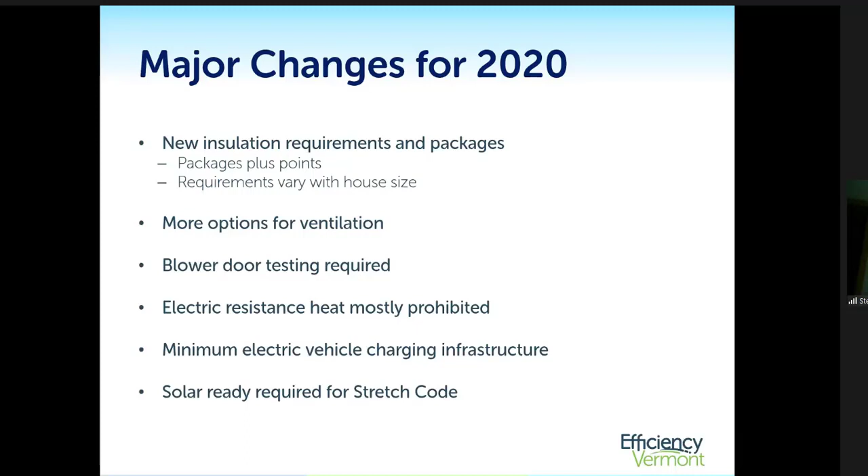One distinction I wanted to call out early on clearly is that there is definitely a distinction between the actual code itself, the full rule of law, and the RBES Code Handbook. They're two different things, and one should not be supplanted for the other.

Many of us are familiar with the RBES Handbook - it's been a variety of colors over the years. The code book, or the handbook, is published by the Department of Public Service. Efficiency Vermont contributes to the content for it. The handbook is still being readied to be published - it is not published yet. Hopefully that will be happening sometime soon; it's in the department's hands to take it forward. We don't know what color the new one's going to be this time around. There was discussion of kilts in the last conversation around it, so it could be plaid, we don't know. But there is a clear distinction between the handbook and the full code.

The handbook is basically there to provide guidance on how to apply the code in the field. The full RBES code language itself, available through the ICC, contains all of the code requirements and the detail of the code. So I encourage everyone to become familiar with both, and the content of today's training is going to be linked directly to the sections and the code language of the full code itself, not the guidebook. So I want to make sure that message is understood. As a builder myself, I was more connected with the code handbook than with the full code, so it's definitely something to be mindful of.

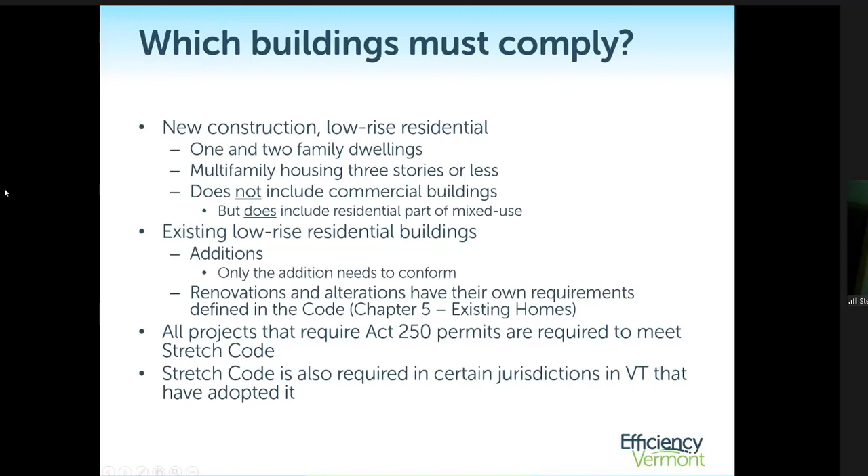Exempt buildings: low energy use buildings, which is a pretty restrictive bar to be met. Unconditioned buildings, so anything that's not a residential building essentially. Mobile homes have their own requirements.

That is a national standard, and those buildings will need to meet those requirements by the manufacturer. One note around mobile homes, though, is that any site-built components, so you're putting it on a basement, a full basement for some reason, or a crawl space, or some sort of foundation underneath, that would need to meet the requirements of the new construction code.

Hunting camps, summer camps, basically seasonal buildings are exempt. Yurts, if you're into that, those are exempt also. And owner-built homes, and there's a distinction with owner-built homes.

This has been used sometimes as kind of an out for builders to not have to fully comply with all of the requirements of the code. But the language around owner-built homes is pretty specific, and all of these conditions need to be met in order for it to be seen under the rule of the law as a true owner-built home.

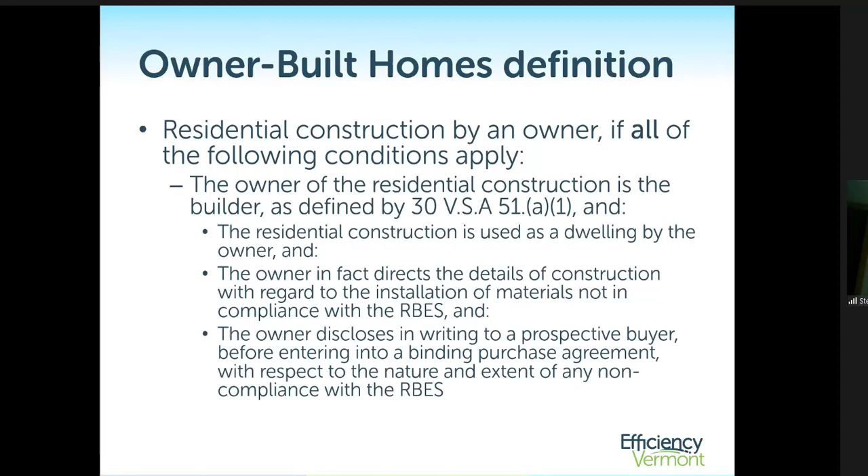So there is that provision, and the owner is still required to submit an RBES certificate, but there is a specific owner-built certificate that they're required to fill out that will define any deficiencies in compliance with the full code.

Existing buildings, additions, alterations, repairs must comply if changes go from unconditioned to conditioned space. So that's a trigger, I would use a cape as an example. If you have a cape with an unfinished second floor and you're doing a renovation project to turn that into conditioned space, that new conditioned space that's adding conditioned volume to the building is going to require that area meet the requirements of the code for new construction.

Insulation projects, if you are adding insulation to a building, the intent is to try to bring those areas up to the current code requirements, but it does allow for basically cavity fill, to fill the cavity that is exposed. So basically, if you're exposing an exterior wall and you have a rough sawn 2x4, that cavity needs to be filled with some type of insulation before it's closed back up. There's not a specific R-value called out that's required.

Replacement windows must comply. So if you're taking a full window unit out and replacing it, that window needs to meet the U-value requirements of the new code. If you're just replacing glass, replacing the glazing in a window sash, that does not need to comply. Storm windows do not need to comply. So more distinctions in what is exempt and what is not for existing buildings.

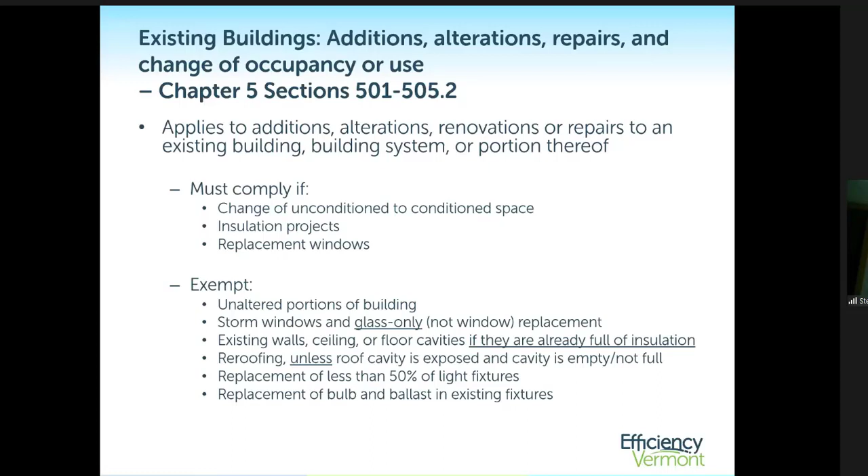Liability, this is really the way that the law was written. Since there is no code enforcement, there's no direct oversight by a state agency. The way that there is some teeth to it is that a homeowner can take civil action against the person who's certifying the building, whether that's a builder or HERS rater or whomever.

But the builder basically has the responsibility to be meeting the full requirements of the code. A homeowner can seek to recover damages that include energy costs, costs to bring the building into compliance, attorney's fees, etc. Claims must be filed under the full rule of filing it as a claim against RBES deficiency within 6 years. I'm sure if you talk to some attorneys, they'd probably see that there's more liability exposure beyond that 6-year window that would be relevant outside of the strict adherence to the RBES rule if there's building durability issues.

One of the other factors coming into play here is we're seeing more adherence to RBES by way of the real estate market. More lenders and title attorneys are looking for the RBES certificate in order to close loans and mortgages.

So just to be clear on this, though, the lack of that RBES certificate does not impinge the title of a property or a home, so the sale can go through as long as the parties agree that they're okay with that. Though there are some of these other factors mentioned here that if that certificate's missing, it may still become a factor in the sale of the property.

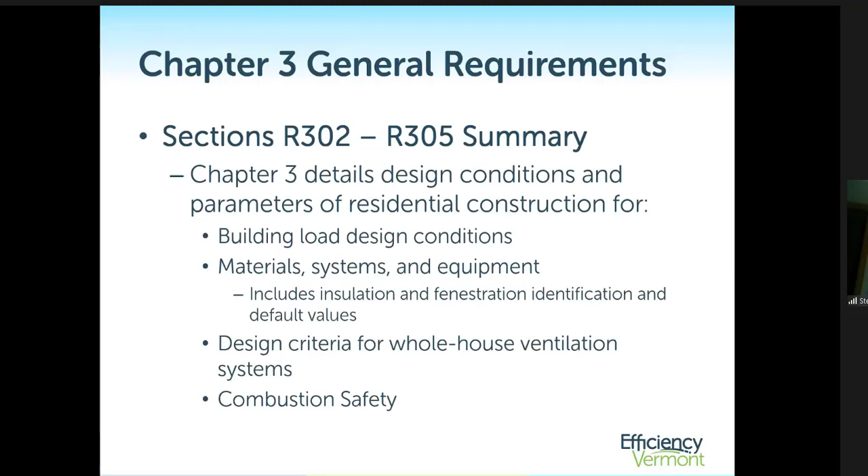Chapter 3, General Requirements. This section covers some of the design considerations and conditions that should be used for determining equipment and systems in the building — building load conditions and design requirements, material systems and equipment. A big part of Chapter 3 is ventilation requirements, mechanical ventilation requirements, and combustion safety.

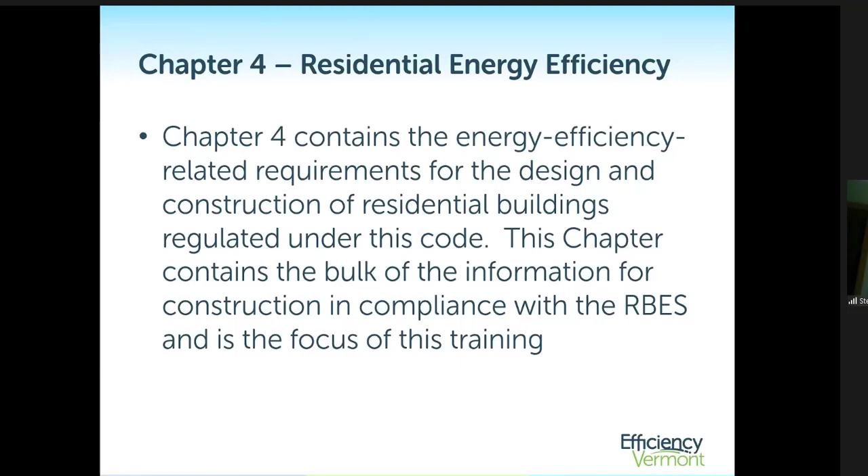The heart of the code, and what the rest of these slides will cover today, is Chapter 4, Residential Energy Efficiency. This section covers all of the building component requirements — the R values, the U values, the alternatives, the installation specifications for those materials. It's the bulk of the code, and as the 2020 code is written, it's built around the prescriptive compliance path.

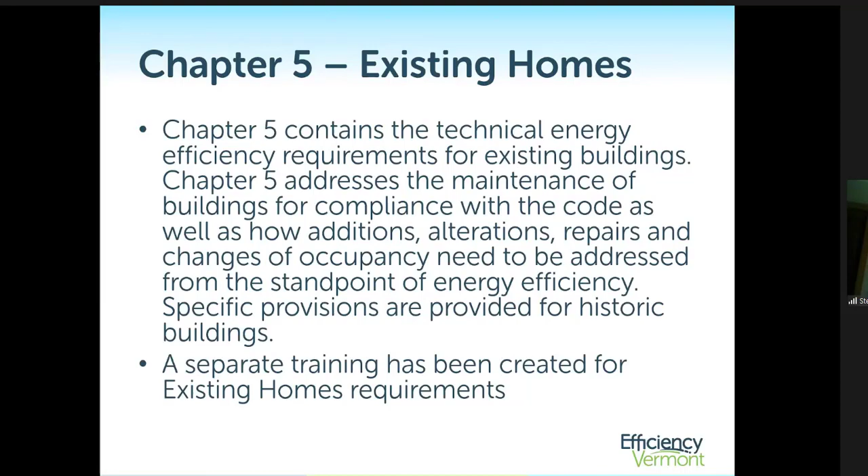Chapter 5 is specific to the requirements for existing homes, and Chapter 6 is basically just a summary of reference standards — fuel codes, the IECC, the IRC, the IBC. I sometimes get IBS mixed up thinking about the code — that's something different though. So there's plenty of content there to refer back to.

So, prescriptive compliance for new construction and additions here. Again, if you're building an addition, it needs to meet these requirements as if you're building a new house. The referenced sections here are sections R402 through R404.

Just to review quickly, compliance methods: you have 3 options to comply with the code — the prescriptive tables, which is what we're going to cover, the REScheck software method, and the HERS rating pathway. The REScheck tool is still in the process of being updated to align with the 2020 RBES from where it was left before, which was aligned with the 2011 RBES. So it's still a bit clunky at the moment, but is being updated and should be ready by at least September 1st as an option.

The HERS rating pathway is the option that Efficiency Vermont offers as far as enrollment in our new construction program. So if you enroll in our new construction program, we will provide the HERS rating services for you.

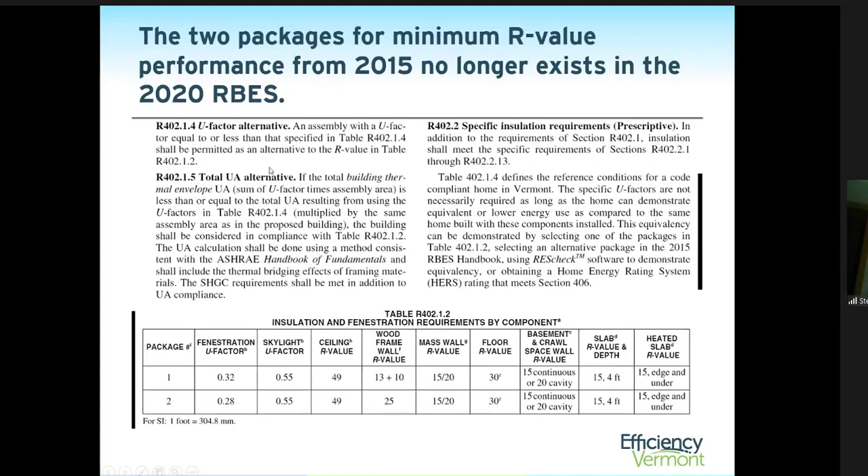One point to make as a big difference from the 2015 to the 2020 code is that in the 2015 code and previous versions of RBES, there was a table, R402.1.2, that was minimum performance requirements for the building. This was basically the baseline - you had to build at least to this standard or better. And then there were the prescriptive tables, which were separate from this. This table no longer exists. This minimum performance package no longer exists. Our reference point now for prescriptive compliance is these 5 packages that are available for that method.

The code review process has basically eliminated cavity-only installation for above-grade walls, except for one package. So there's only one package available now where you can just do cavity fill in above-grade walls. Code is moving in the direction of continuous installation requirements, so there are 3 different continuous installation packages. Log homes are their own separate category - they have their own requirements, and there's a prescriptive table in the code specific to log homes.

As a reference point for the packages, I'll talk quickly through package 4, the cavity only. For any of the continuous installation options, your ceiling requirements are going to be R49. If you're going to do cavity only, you're going to be required to get up to R60 in a flat attic, R49 in a slope.

A bigger bump here is foundation insulation. It goes from R15 to R20 continuous if you're going to do cavity only, or a combination of R13 in a cavity with R10 of continuous as well.

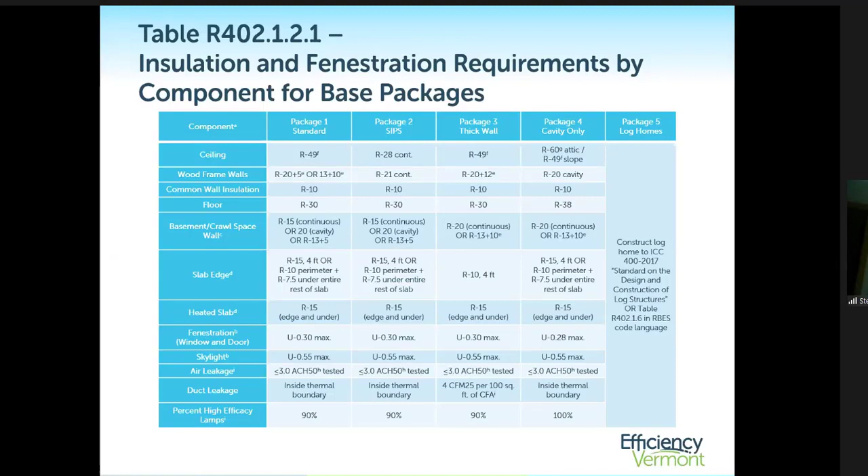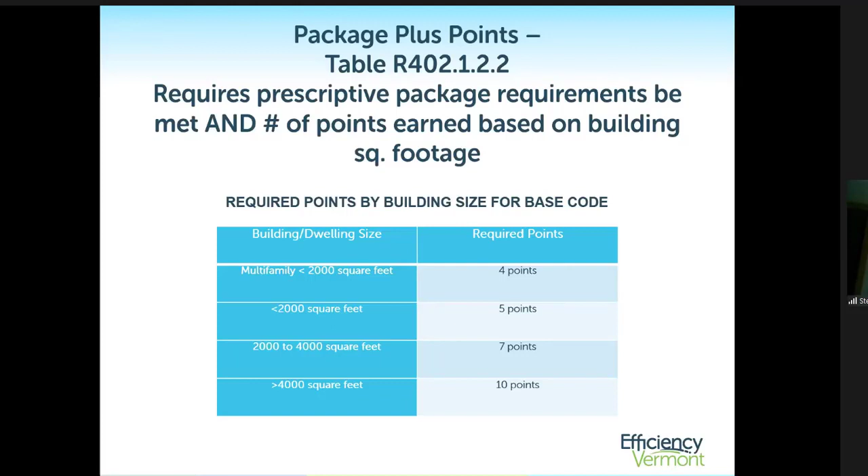The next big jump from this is, in 2015 and other versions, you would just choose which package you wanted to follow, meet all of those requirements and follow the installation requirements, and you're good to go. But moving forward now, you're also required to attain points based on the size of the house. This is a requirement prescriptively and with some of the other pathways too - you need to be gaining points in a points table based on the size of the house.

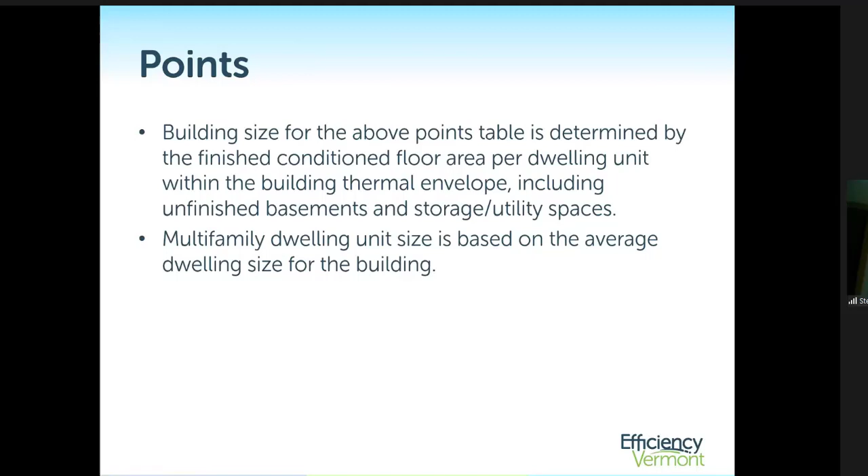Building size is based on everything within the thermal envelope. So even if you have an unfinished basement or some storage type areas, those need to be included in the calculation for square footage. Multifamily size is based on the average dwelling size for the building. There's a pretty expansive table in the code now of what your options are for attaining points based on different categorizations.

I'll use this example - you can see that there are things where you can upgrade the walls from, if you choose the cavity only package and you want to comply with the component values in that, but you can flex on the walls. You can gain a couple points there.

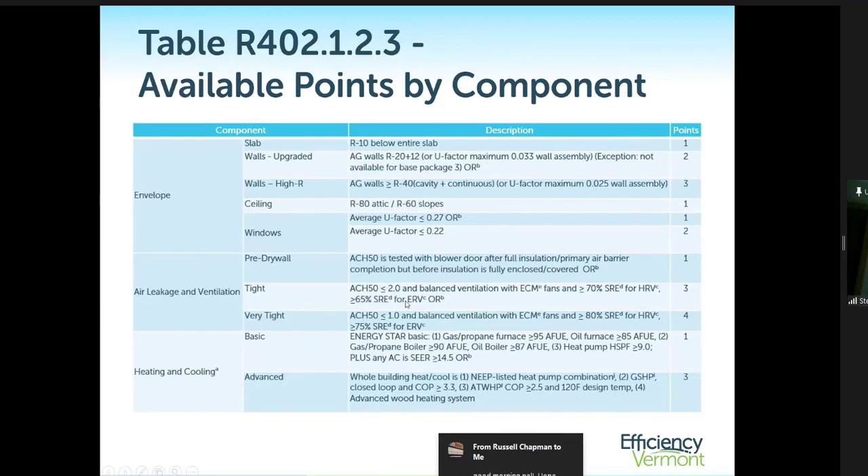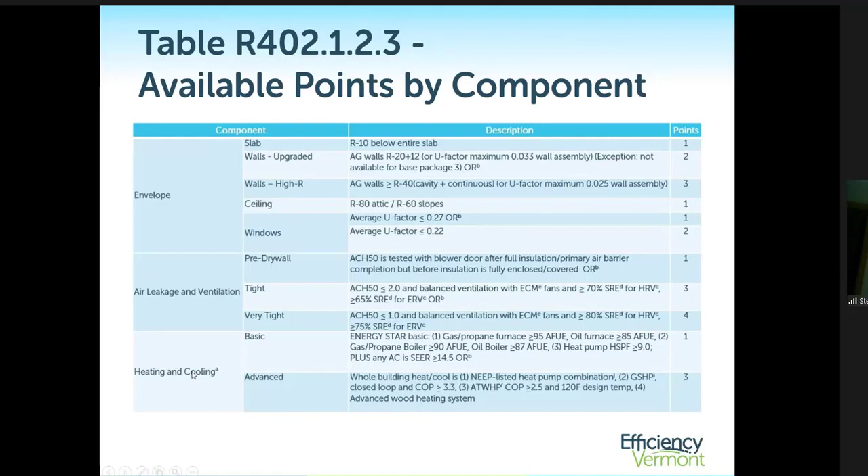You can gain a point by having a pre-drywall blower door test done on the building to verify that you've got a well-performing air barrier. You can install balanced ventilation as an alternative to exhaust only. And then there's specific performance requirements if you're going to be installing an HRV or an ERV that are laid out here, which we'll touch on further along. So you're gaining points by combining any items in these categories to meet what's required based on the size of the house.

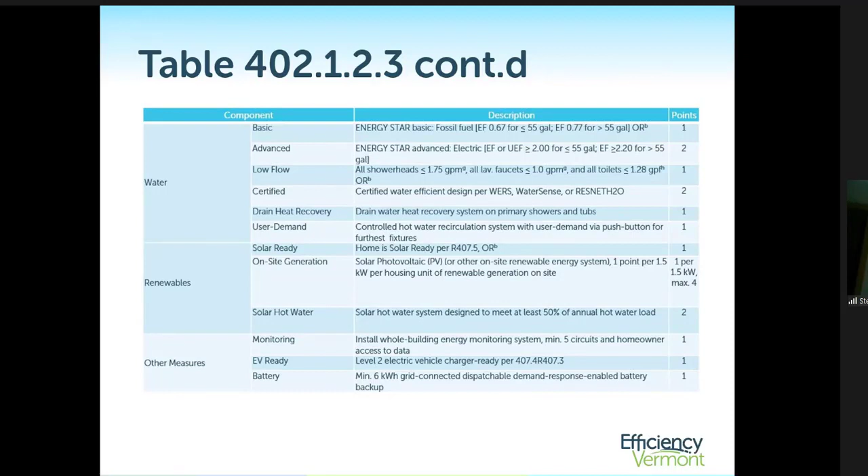Stretch code is a more stringent requirement than base requirements. Stretch code comes into play if you have a project that has an Act 250 permit pulled for it, and also some other towns like South Burlington, and I believe Williston now too, having adopted stretch code, have some more stringent requirements around building performance.

It does push you in the direction needed to do balanced ventilation, and if you're doing stretch code and going to use balanced ventilation in the building versus exhaust only, you need to be specifying an HRV or an ERV that has an ECM motor and has an efficiency of at least 70% for an HRV, or 65% for an ERV.

This is why the code is kind of written as a design document, so that these things can be understood, defined, and specified at the beginning of the project. Because I tell you right now, it's much harder to find an ECM motor HRV than just going and pulling one from the stock at Webb's or Granite Group.

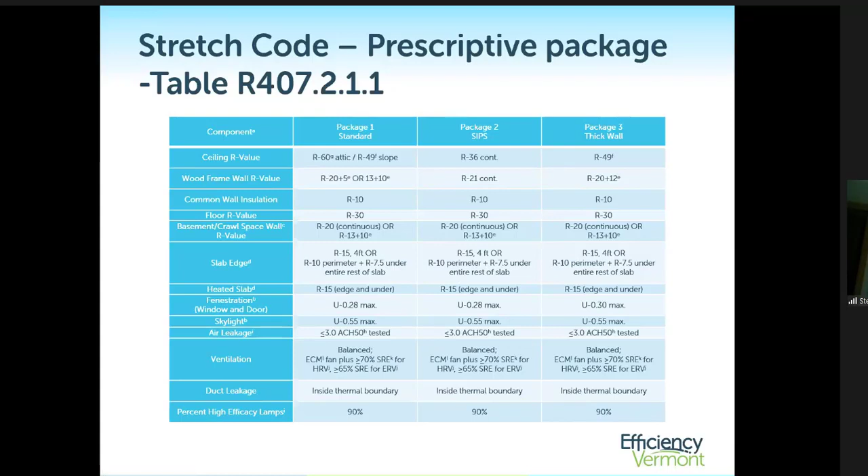They're working with those suppliers and distributors to help them get to the point where they're going to have more code compliant options available. But these are things to be having conversations with your subs about, to make sure everyone's clear as to what's going to be put in and what's getting put in meets the requirements of the code.

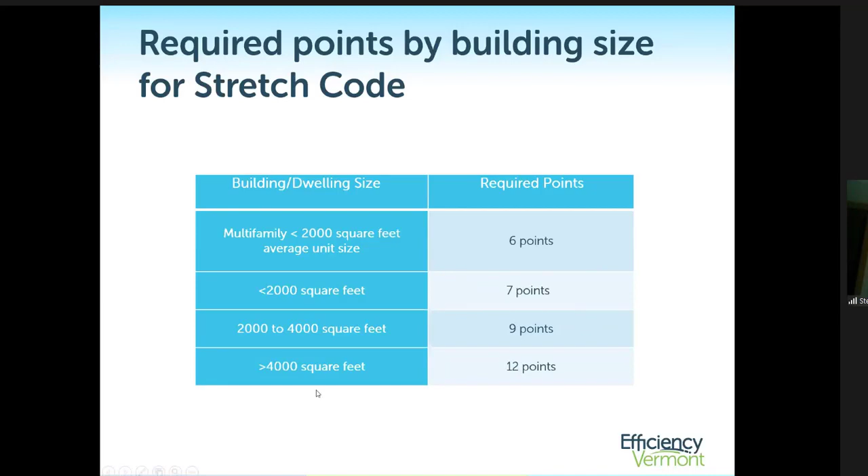Same points requirements with stretch code, but a little bit of a bump up in the number of points required based on the building size. So again, the same tables we're talking about here can be referred to for those points.

Stretch code compliance means all the base code requirements need to be met, as well as what's defined in section R407 that's specific to stretch code. So you have only two options with stretch code to comply: you can use the prescriptive path as we're defining here, or you can have a HERS rating done. You cannot use REScheck as an option to comply with the stretch code.

I don't go into detail on the solar ready, but basically there are requirements in stretch code for both electric vehicle charging and for components to be put in place to allow for the integration of photovoltaics, either at construction or at a later date. So there are some direct provisions in stretch code that call those things out specifically.

Getting back to base code prescriptive compliance, I'll just put it out here at the beginning that there is an alternative to meeting the full R values of the prescriptive tables that's carried through from previous versions of the code. This is the U factor alternative. There's a table specified in the code that allows you to use an assembly value versus a component value to comply. This means you have to do some calculations to understand what your full U value assembly is going to be versus what you have in the cavity.

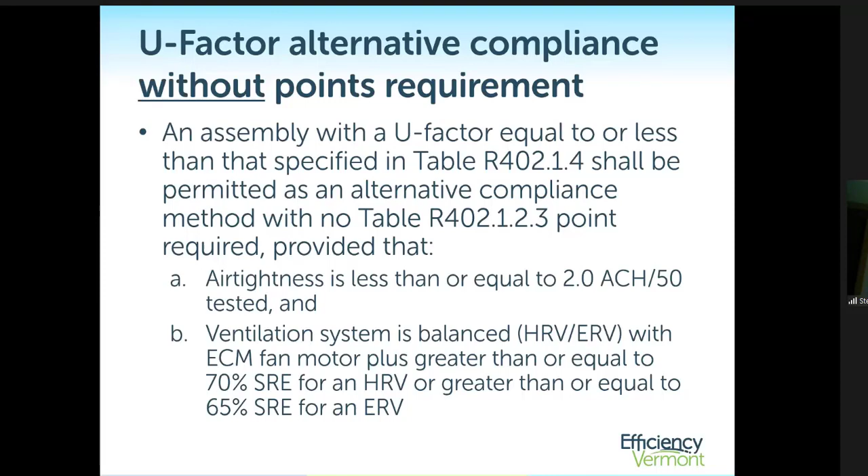As a backup, I provided Chris with some reference documents I've created that pull out content from the code specific to different trades. Basically, cliff notes for code. We'll have those available to reference so you're not trying to think back through all of this and remember how it applies. That'll be available to everyone who wants to take advantage of it.

Just briefly, the difference between R-value and U-value. I'm not going into real detail, but the key takeaway is that in this alternative method, you have to do the full assembly calculation, not just substitute U-value for R-value in a component. So the bottom line is try to meet the prescriptive values completely in the full 6-package prescriptive table. These are the U-value alternatives.

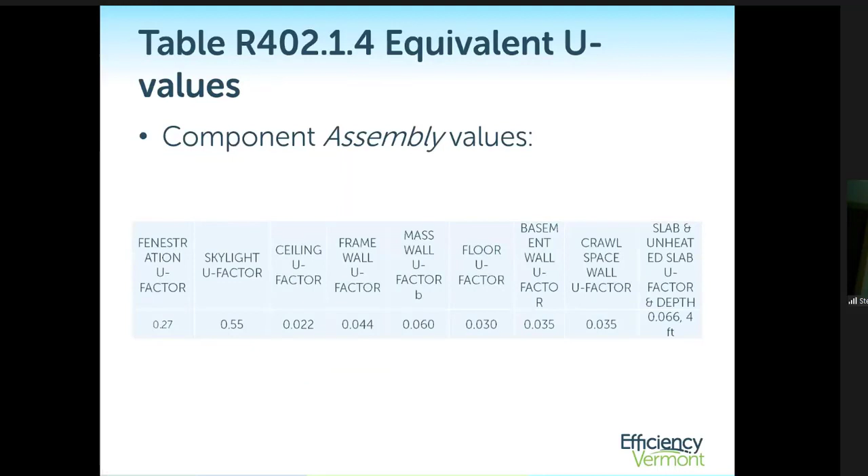Some other notable exceptions: for ceiling insulation, where R49 is required in the prescriptive table, R38 can be substituted over 100% of the ceiling area as long as it's installed at full uncompressed height out over the exterior walls. The same provision is allowed for substitution to R60 — you can use R49 as an alternative to R60 as long as it's also fully uncompressed over the exterior walls.

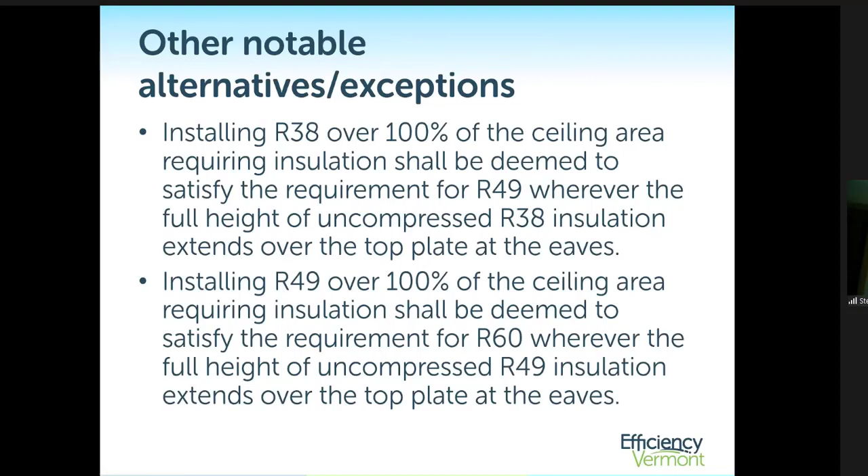For closed cavity ceilings, if you have a section of the building where R49 isn't practical given the framing member constraints, R30 can be accepted as an alternative, but there are restrictions on area — limited to 500 square feet or 20% of the total insulated area, and it also needs to be full uncompressed height all the way out to the exterior wall.

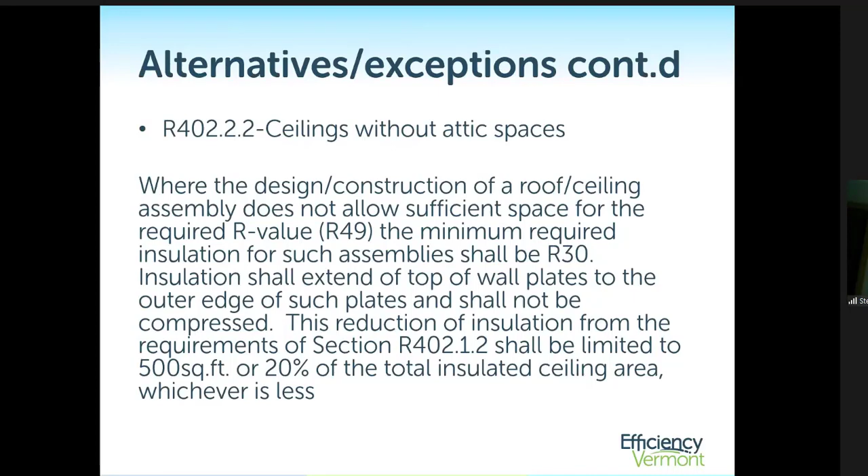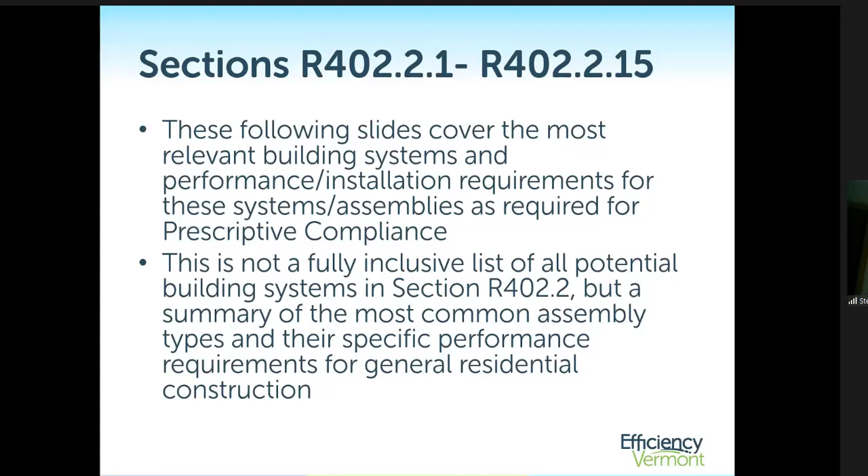This next section of the code gets into actual performance requirements for the installation of materials in the building. It covers air sealing details, the actual installation of insulation and how it needs to be installed, as well as other equipment installation requirements. The next slides are a summary, not all, of those building system requirements — these are the sections to refer back to in the full code if you want all the installation requirements.

Unvented attic assemblies — this is a big one, covering full cavity type fill assemblies. No interior vapor retarders can be used on the ceiling side of an unvented attic assembly. Where wood shakes or shingles are used, an air space needs to be created at the roof underlayment above the sheathing. Any open cell spray foam, not closed cell, shall either be a class 2 vapor retarder or have a vapor retarder coating or covering if used in a closed cavity assembly.

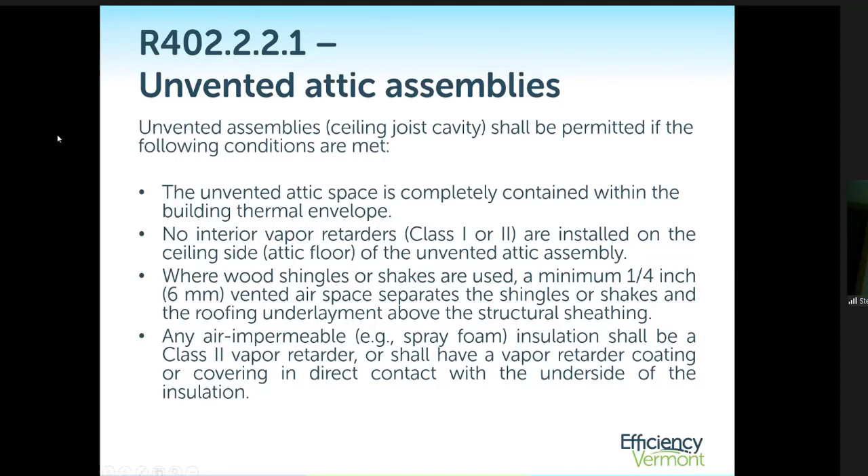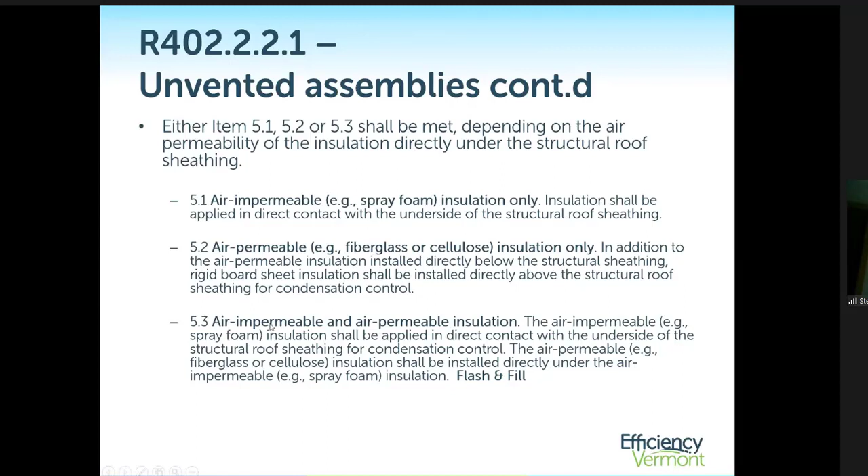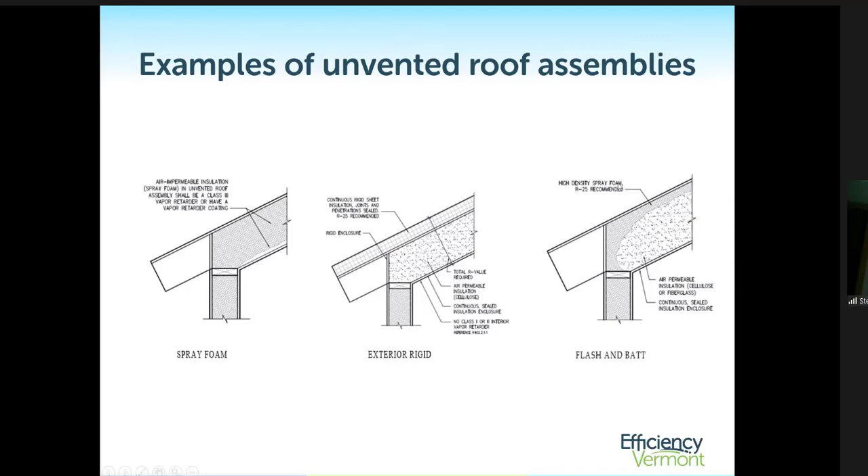Continuing with unvented assemblies, you can do them with three different cavity pathways: fully air impermeable or spray foam insulation only, air permeable insulation in the cavity only, or a combination of both. Here's the picture version: fully closed cell air impermeable insulation, or cellulose, mineral wool, fiberglass in the cavity with a continuous insulation layer above meeting about 50% equivalent R-value cavity to continuous, and finally the flash and batt or flash and fill assembly, getting about 50% of the R-value in closed cell or air impermeable insulation and filling the balance with fiber insulation.

Eave baffles are specifically called out in the installation requirements. Basically you need something at the eave if you're using an air permeable insulation in a rafter cavity or ceiling assembly to keep wind washing from occurring through the insulation.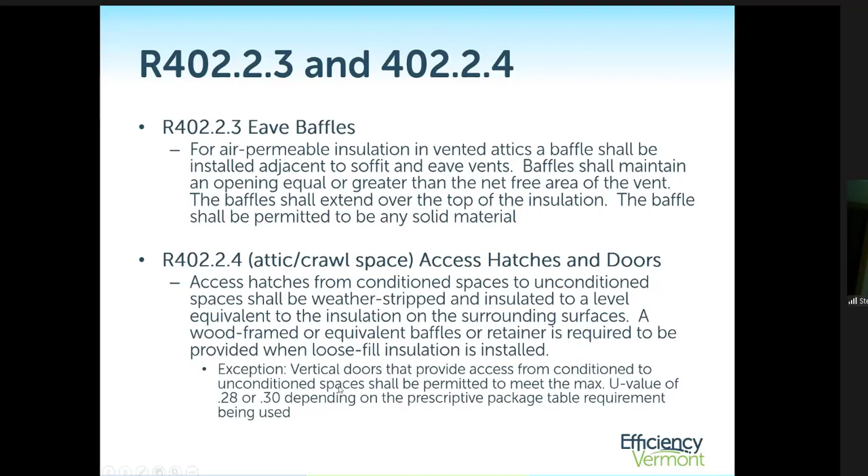Attic access hatches or doors, or crawl space hatches or doors, need to be insulated to an equivalent value of the area surrounding it, and also weather stripped. There is an exception for using more of a pre-hung type entry door as an option if the space allows for it.

Floors: if you're insulating a cantilevered floor or an exposed floor over a crawl space, the floor cavity insulation needs to be in direct contact with the decking above, so you can't have a gap. You can't put an R30 batt in a 2x10 cavity and have it just lying there against the bottom of the joist. It needs to be in direct contact with the subfloor.

Basement walls: basically top of the wall to the bottom, down 10 feet or to the slab, whichever is less.

Slab on grade floors, as was defined earlier in the table, of that R15 or the R10 plus 7.5 requirement. So these are any slabs that are either on grade or 12 inches or below, and they need to meet those performance requirements.

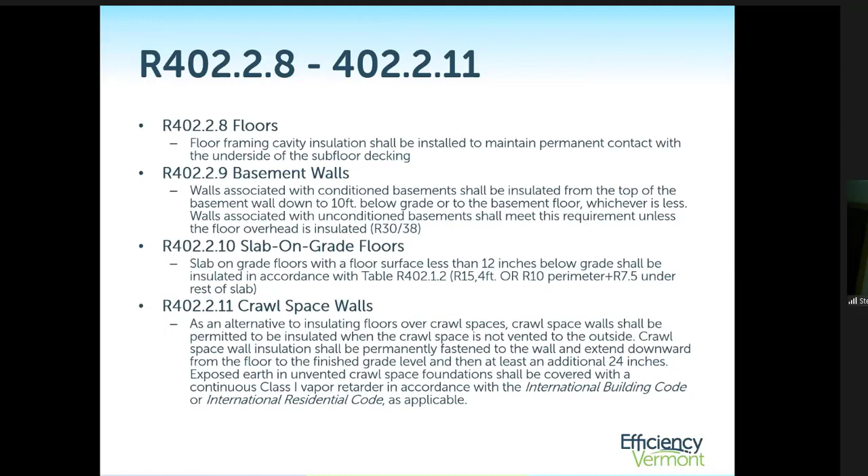Crawl space walls essentially need to be treated as a basement wall would, with the inclusion of a Class 1 vapor barrier on any exposed soils that would be in that crawl space if a slab has not been poured.

Frame walls, above grade walls - there's more content in the code around vapor retarders and moisture control in building assemblies. The handbook actually has a lot of great content for this version that supports more of these options, a lot of construction details and assembly drawings that show what some of those options may be.

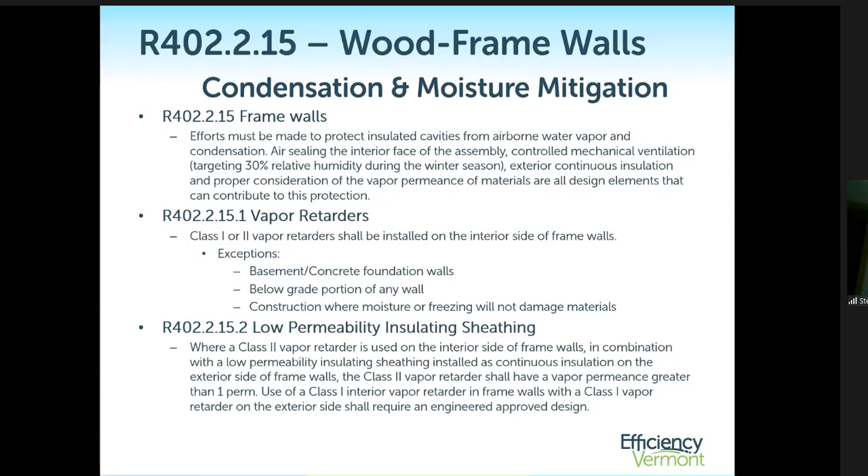But basically, we're getting more definition around not creating the vapor barrier sandwich. I think we're all familiar with that, and the threat that it poses.

So Class 3 vapor retarders can be used on the interior side of frame walls over certain assemblies. So vented cladding, meaning if you have a rain screen type assembly on the exterior wall, you can use a Class 3 vapor retarder on the interior versus a Class 1 or 2. And also there are provisions where you're running continuous insulation on the outboard side of the wall sheathing.

If you're doing continuous insulation on the outside of a building over the sheathing, it is pretty important to be able to have a drying mechanism to the inside, and that's where this provision allows for that.

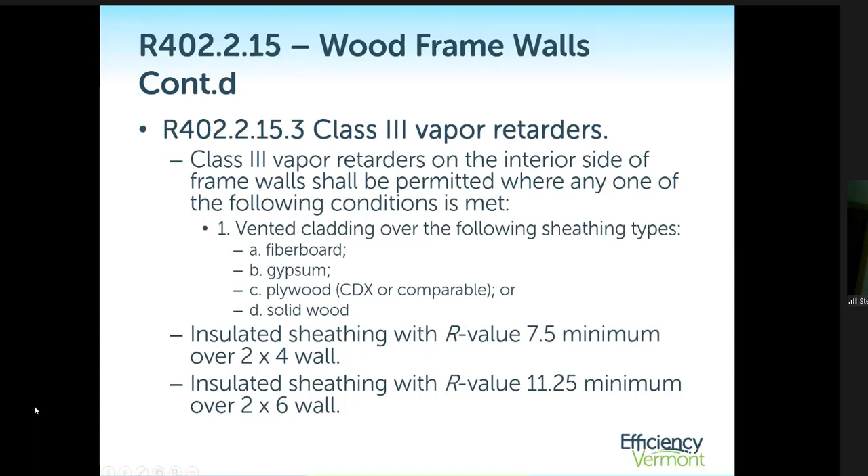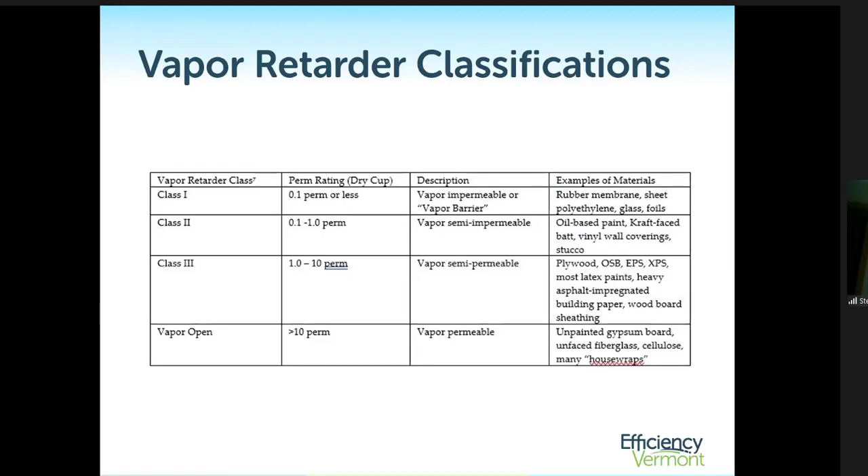Here's a table of some of the vapor retarder classes and material examples of different types of class vapor retarders. These are some of the examples of the references that are in the handbook - some assembly types and descriptions of what some of those options are.

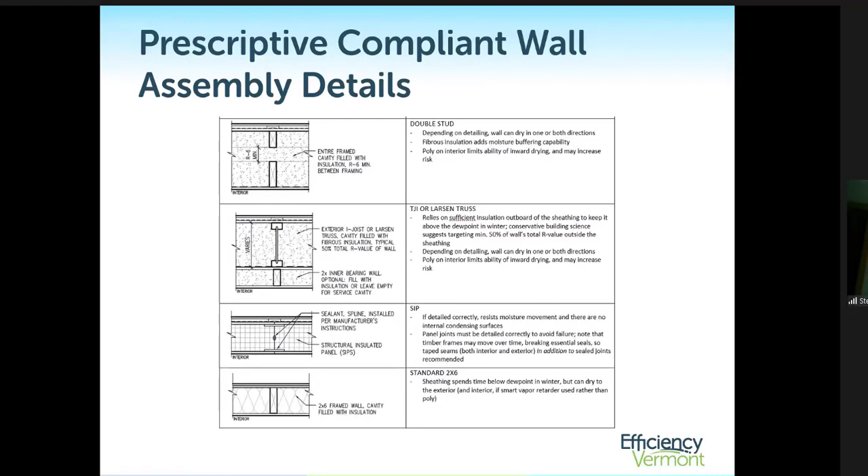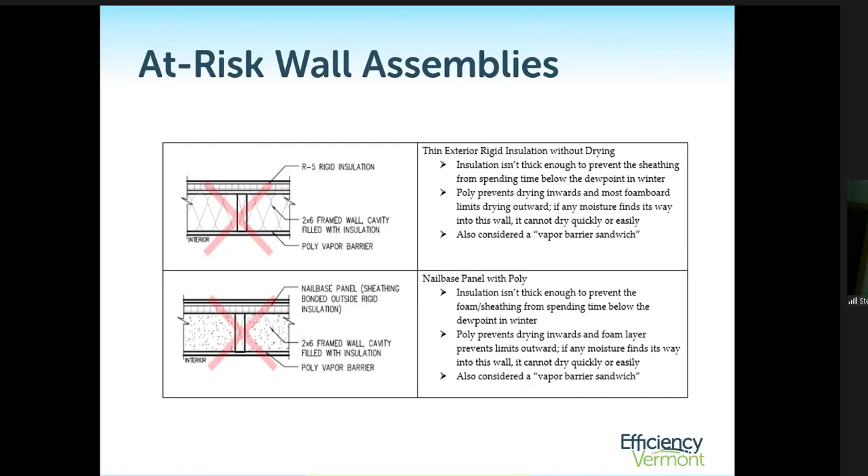Again, I'm not going to go into these in detail right now because of the time, but this will be available for you to reference as you're looking through this content after we're done here today. And here's some wall assemblies not to do, that kind of define that vapor barrier sandwich sort of assembly.

Windows and glazing - a couple key points to call out here. Area weighted average of fenestration shall be permitted to satisfy the U factor requirement. So if you're using the cavity only package and you need to hit a 0.28 U value for the windows, you can have some windows that are a 0.28, some that are a 0.27, some that are a 0.29. As long as it all kind of balances out to be 0.28 or less, you're good to go.

Up to 15 square feet of fenestration can be exempt from those requirements. Same thing, up to 24 square feet of exterior door assemblies are exempt from the U factor requirements. And that covers that.

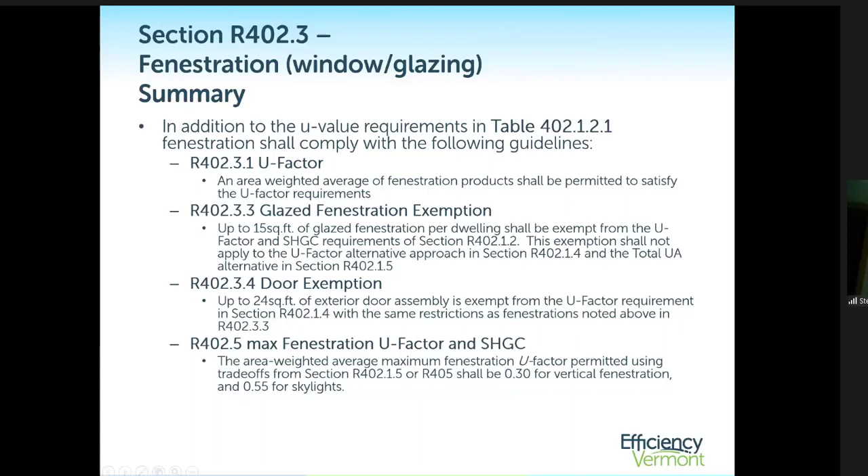Air leakage is a full table in the code that covers air sealing details, requirements, and specifications. So that is this table, R402.4.1.1. This goes into more specific detail around what areas of the building need to be air sealed and with what methods. In the full code language, it's all words. In the handbook, it's a lot of pictures. So choose your poison on that one to define which way to go for compliance.

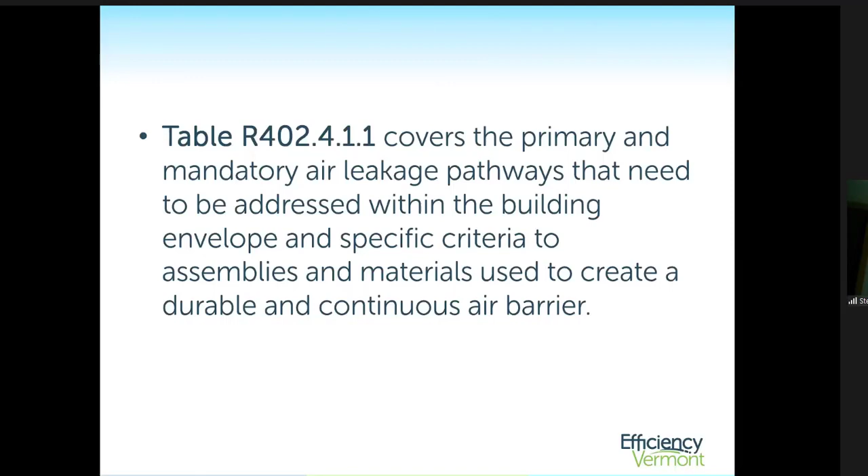The key point here is that this table details the requirements for alignment of the air barrier with the insulation measures. We all understand that your air barrier, insulation details, and thermal barrier need to be aligned. These sections go through that in more detail, calling out specifically areas that need to be addressed.

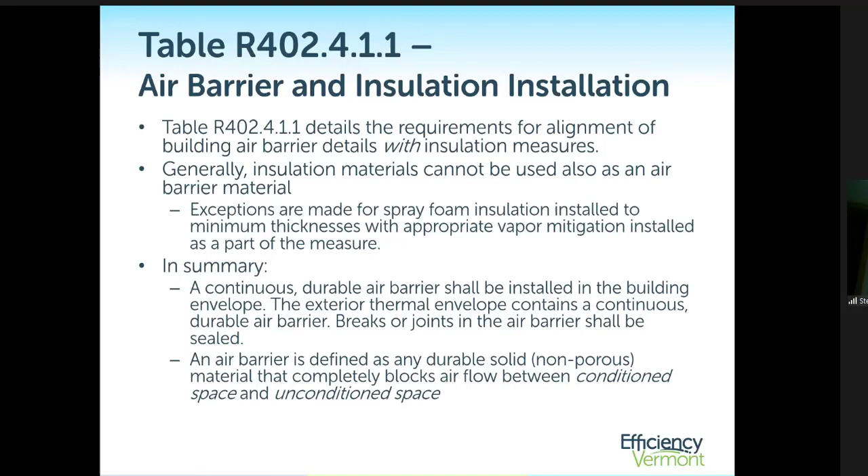But continuity here is the big key. The air barrier needs to be a continuous, durable layer in the building. All joints should be sealed. It needs to be some sort of assembly that will withstand the test of time. I encourage you to use some of the resources in the handbook to help guide any questions or communications with your subs on this.

One key takeaway for anyone trying to direct these outcomes on a project: there really should be somebody on the crew, whether that's a lead carpenter, the GC themselves, or an understanding with your subs, that this is an integral part of the performance of this building. Attention needs to be paid throughout the construction process so details are not missed, changed, or altered. So someone on the crew or within the process needs to be accountable for the outcomes of the installation and integrity of the air barrier.

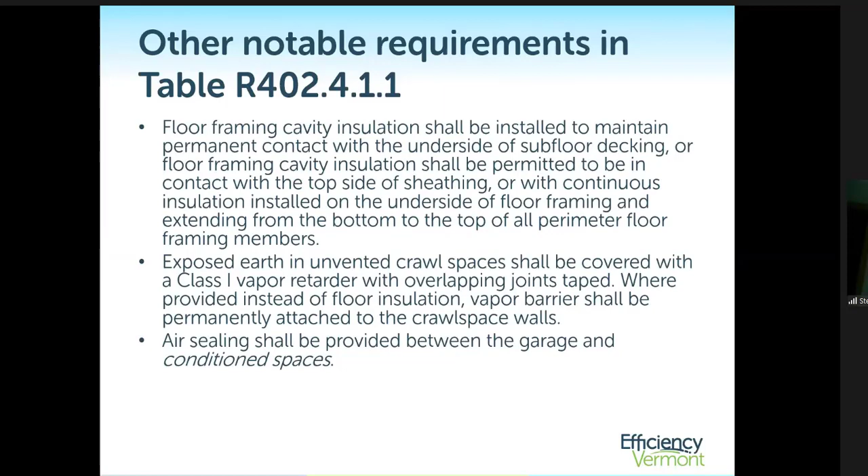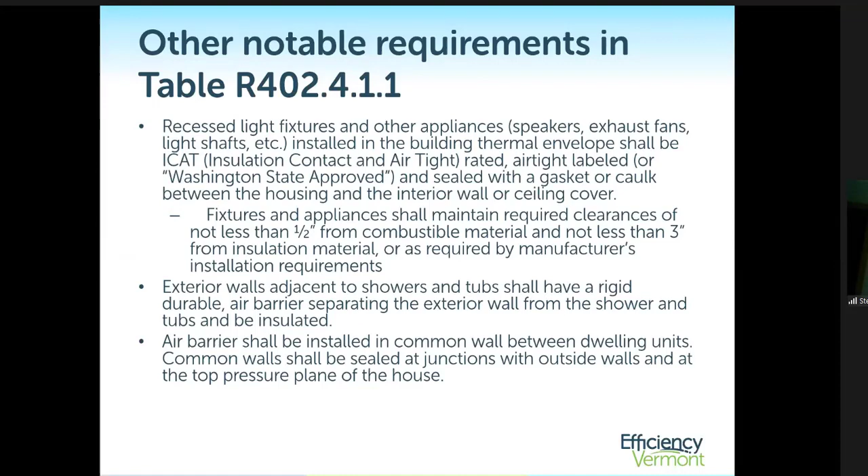I'm not going to read through all of these, but these are some of the things I pulled out that are specifically called out in that table as requirements for attention.

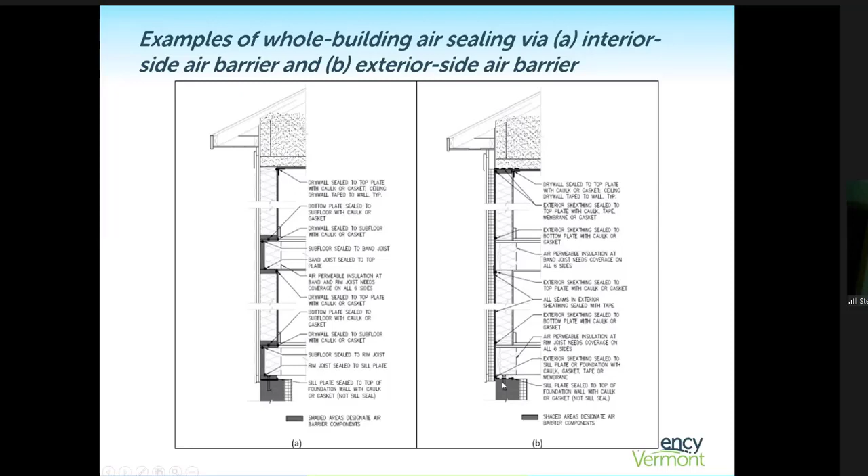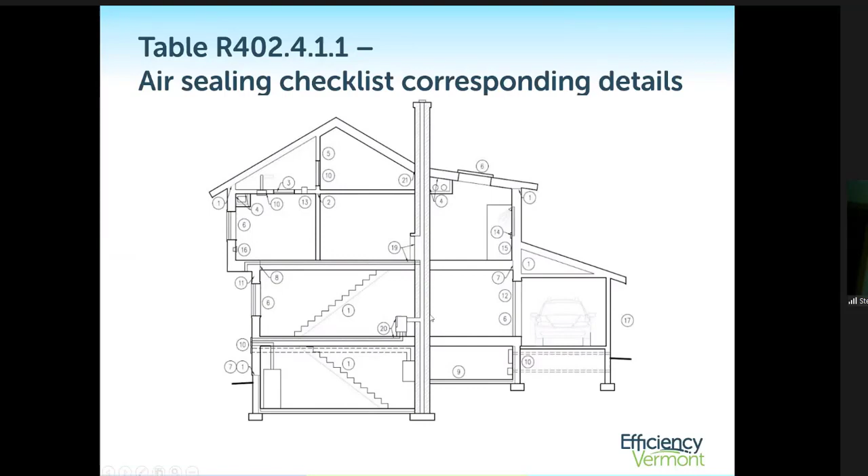Also in the handbook, there is a full checklist of air sealing details and this drawing that references those items in the checklist.

So we'll take a second to talk about, now that you've put all this hard work and effort into attaining a tight building envelope, what do we do to verify it? For new construction, you are required to contract with or hire someone who has the background and experience to properly do a blower door test on the building and report the outcomes.

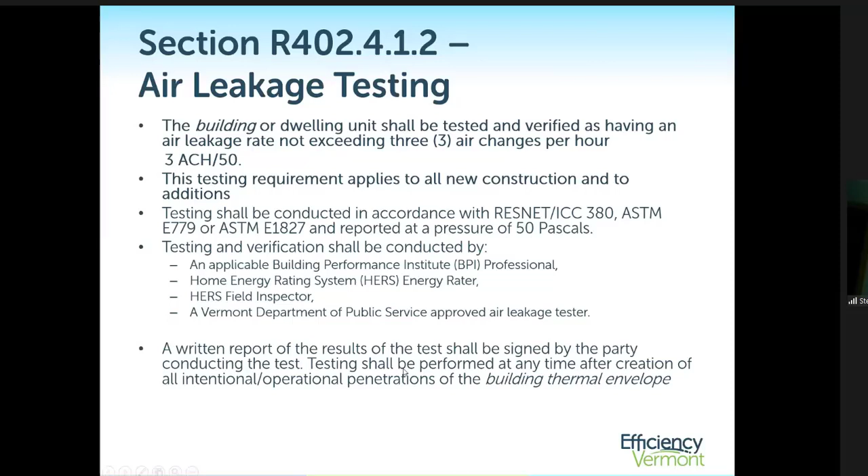A BPI certified professional can be hired for this. A HERS rater, a certified RESNET HERS rater, can be hired for this. A HERS field inspector - and the Department of Public Service, in conjunction with Efficiency Vermont, has also been working on providing a testing certificate for builders or others who want to get trained on properly using a blower door and performing these tests for new construction and additions. So it is a requirement that testing be done and that the outcomes be reported as part of the permitting or RBES process.

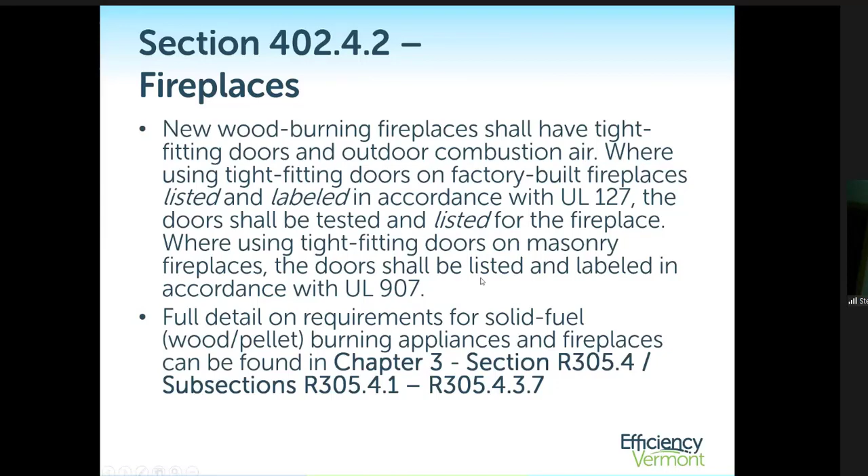A few other items to be aware of: any wood burning fireplaces or stoves in a new house or addition shall have tight fitting, gasketed doors, as well as outdoor combustion air directly to the firebox. If you're building using a factory-built assembly, it needs to be UL listed and labeled to meet those requirements. And if you're using doors on a masonry fireplace, it also needs to be a UL listed assembly. Full details are available in Chapter 3 in the combustion safety section, but definitely something to be aware of.

This mentions how any home being built right now to the 2020 RBES is basically going to be considered of unusually tight construction as defined by the fuel laws or requirements for combustion equipment. So basically any combustion equipment in a new house needs to have combustion air supplied directly to the burner or firebox - closed combustion equipment only. This is definitely something we all need to be paying attention to, because the last thing you want is a beautiful stone fireplace in a brand new house that doesn't have enough air to burn the wood.

So section R403 is getting into mechanical requirements. I do have another training, talked with Chris about, that we could potentially offer in the coming weeks too, that gets into more of these details about what the mechanical requirements are for new construction, or in the code in general. There's a lot of stuff here that really needs to be paid attention to, and conversations that need to be had with our mechanical contractors to make sure we're getting performance and outcomes that align.

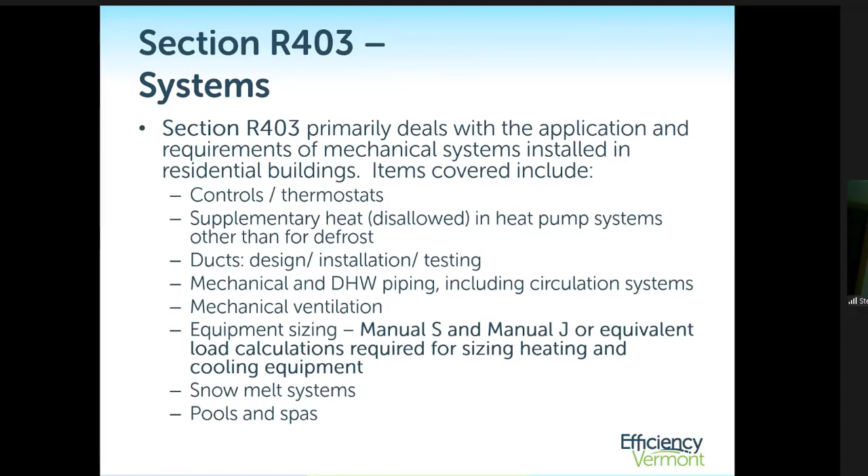A big part of this is actually doing load calculations and distribution design for mechanical - for both heating, cooling, and ventilation equipment. There's specific language in the code in both Chapter 4 and Chapter 3 that detail those requirements, and I certainly encourage everyone to become familiar at least with what those requirements are, so you can have informed conversations with your subs.

Electrical and lighting systems.

No less than 90% of the lamps or bulbs in a building need to be LED, CFL, or high efficiency fluorescent, which is pretty easy now because that's pretty much what's available on the market.

Electric resistance heating is specifically called out at this point in the code because of some circumstances arising around equipment options. Heating a building with electric resistance only is prohibited. If you're using heat pumps, they need to be cold climate rated heat pumps, and if they do have any supplementary electric resistance heat, they should have controls so that supplementary heat does not come on when the heat pump itself, the compressor, can meet the full load of the house.

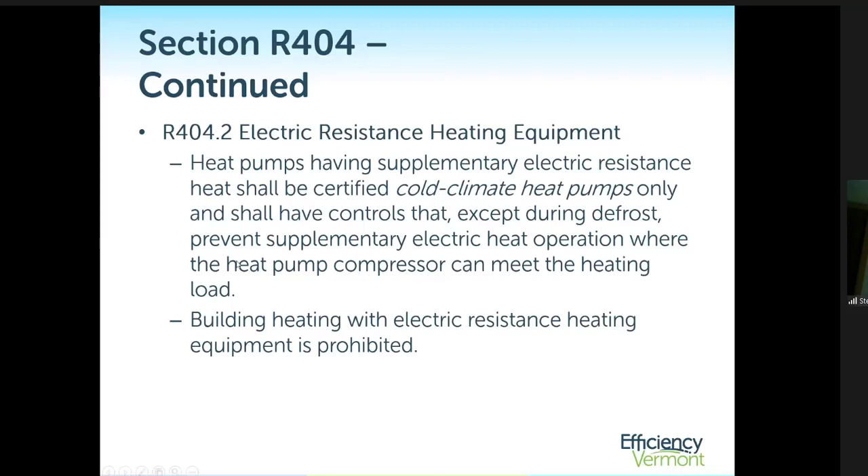In more specific detail, this calls out that replacement of existing electric resistance units is still allowed. So if you have an existing home with failed electric resistance strips or otherwise, those can be replaced with new without being non-compliant.

Electric resistance heat can still be used in limited areas of a house where the distribution of the main heating system cannot reach those spaces. This aligns with what we're seeing in new buildings being built highly efficient and utilizing heat pump equipment—compact ducted, centrally ducted, mini splits, air to water—where the code will allow for a resistance panel in a bathroom not being hit or met by the central distribution system.

Along with that, any buildings using heat pumps as the primary heating system can use electric heat as mentioned, but that supplemental electric resistance needs to have some measure of control that prevents it from operating when the outside air temperature is 5 degrees or higher—basically meaning the heat pump in those conditions can meet the full heat load of the house at a COP of 2 or better, which is what the cold climate heat pump rating would require.

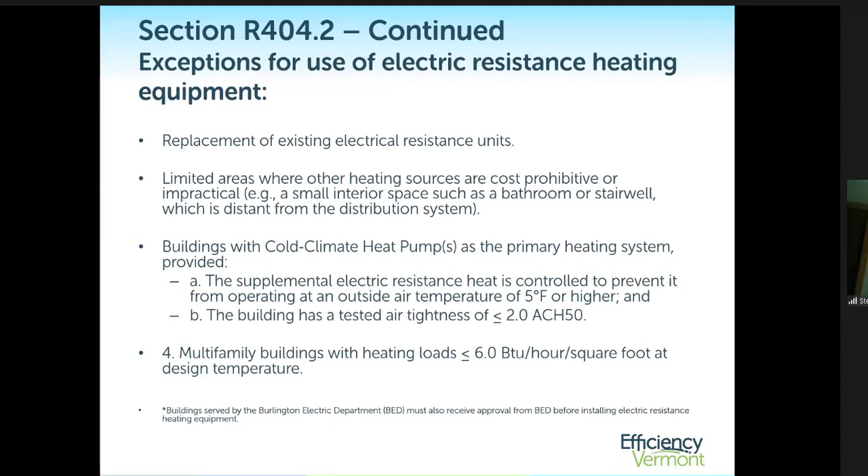Also, in order to use electric resistance as a backup in these situations, the building needs to be 2 ACH or better. And then multifamily buildings have some other exceptions around performance that will allow for electric resistance to be used.

Electric vehicle charging is triggered by multifamily requirements as well as stretch code. Multifamily developments of 10 units or more shall provide level 1 or level 2 electrical chargers based on a percentage of units built. That same requirement needs to be met if you're in a jurisdiction that has adopted stretch code, or if it's an Act 250 permitted project—you'll need to provide electric vehicle charging stations, at least one in that circumstance.

Last few slides here, we're going to go into mechanical ventilation requirements. This is detailed in Chapter 3 and also some sections in Chapter 4.

As a public service announcement, mechanical ventilation is something we all need to be paying attention to now because we're getting much tighter building envelopes by default, just due to the building materials and construction process going into residential building at this point. We need to manage moisture, especially in these buildings, as well as general indoor air quality, especially given our current circumstances. There's a lot more attention being paid to indoor air quality, so it's something we all need to make sure is getting done, as best as possible and as best as can be afforded in any building.

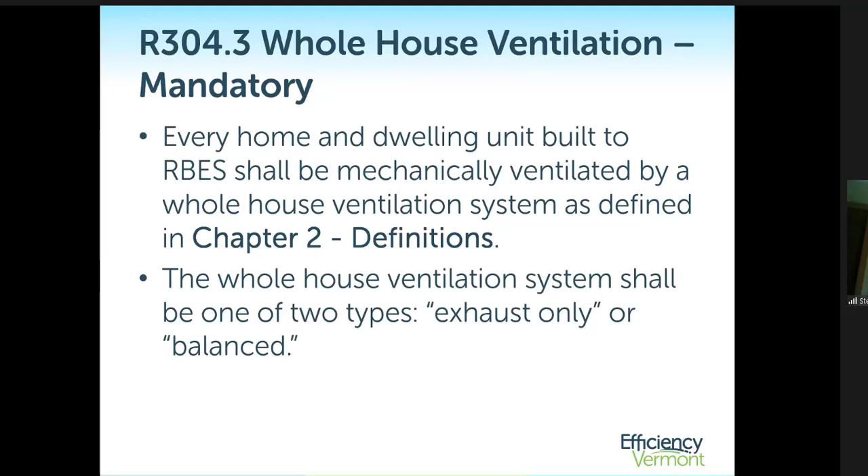Every new home needs to have a whole house ventilation system as defined in the Chapter 2 definitions, as I mentioned earlier, worth referencing. That whole house ventilation system can be either exhaust only or balanced ventilation.

To comply with the requirements for whole house ventilation, you can either use a prescriptive table available in the code, R304.6, or you can do what I think we all should be doing—figuring out what the ventilation requirements are specific to the house by using one of these defined standards for calculating building ventilation rates. The most common and industry standard is ASHRAE 62.2. An alternative is the Building Science Corp standard or passive house ventilation calculation standards.

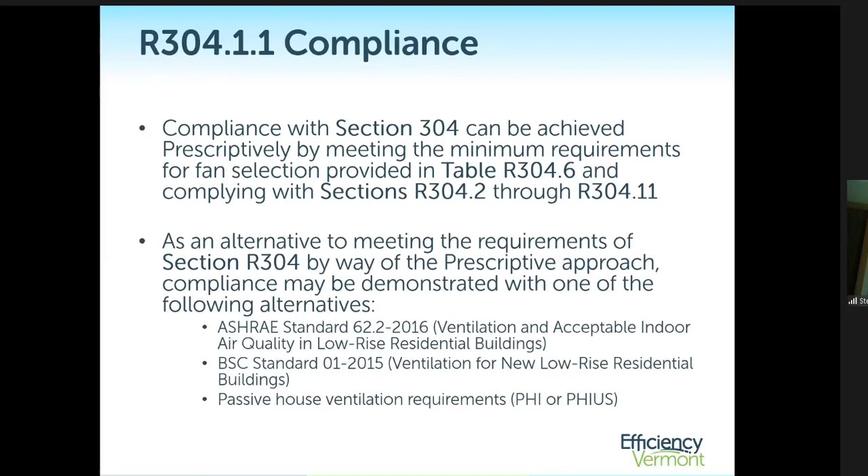So you can do it prescriptively by following the tables, which we'll show you here in a second, or do the actual calculations—there are some easy tools online that can help you do those calculations.

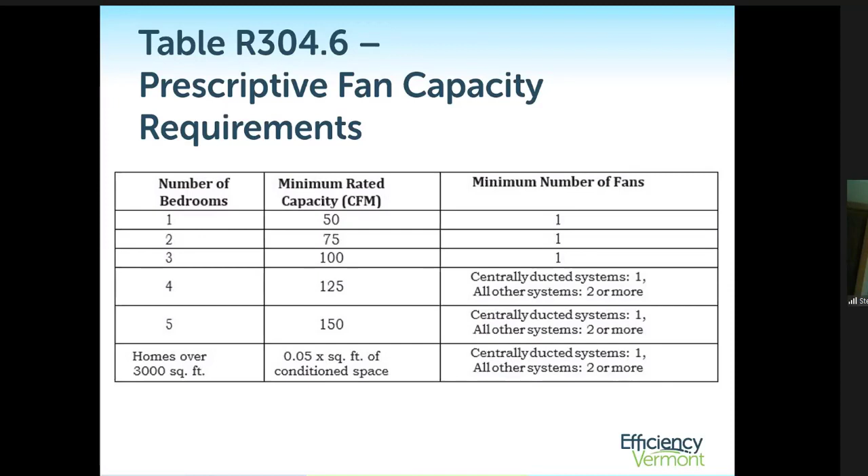So prescriptively, given the number of bedrooms in the house, you can install in a 3-bedroom house one bath fan, rated at 100 CFM, and call it good. You've met the whole house ventilation requirements as long as that fan is run automatically. I'll leave it up to you to decide if you have a 3,000 or 2,500 square foot house with 3 bedrooms, and one bath fan as your whole house ventilation system, whether that's actually going to function as a whole house ventilation system. That's just my public service announcement. But you can do that and meet the code prescriptively, and you're good to go.

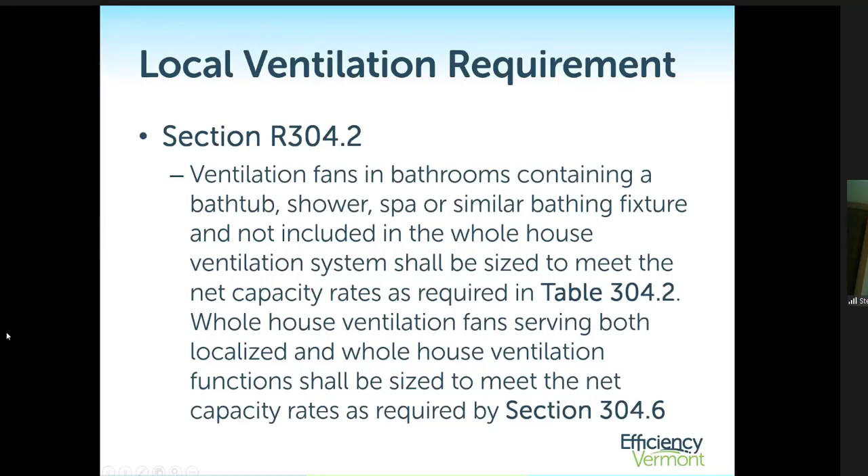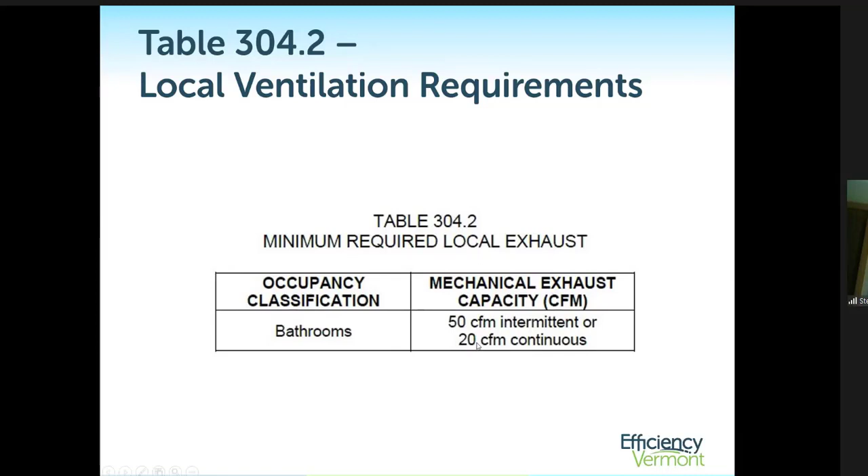Alternatively, you can do the full calculations and look at a more distributed ventilation system. While meeting the whole house ventilation requirements, bathrooms that have bathtubs, showers, spas, or similar fixtures have specific performance requirements that need to be met too. There's a minimum ventilation rate needed in those rooms outside of the whole house ventilation requirements. Bathrooms need at least 50 CFM of intermittent exhaust if it's just on-off switched, or 20 CFM if that bathroom exhaust is being met by a whole house ventilation system. The 50 CFM is for an independent bath fan serving the bathroom itself. The 20 CFM is for an HRV, ERV, or other centrally ducted ventilation system running continuously. It needs to move at least that amount of CFM.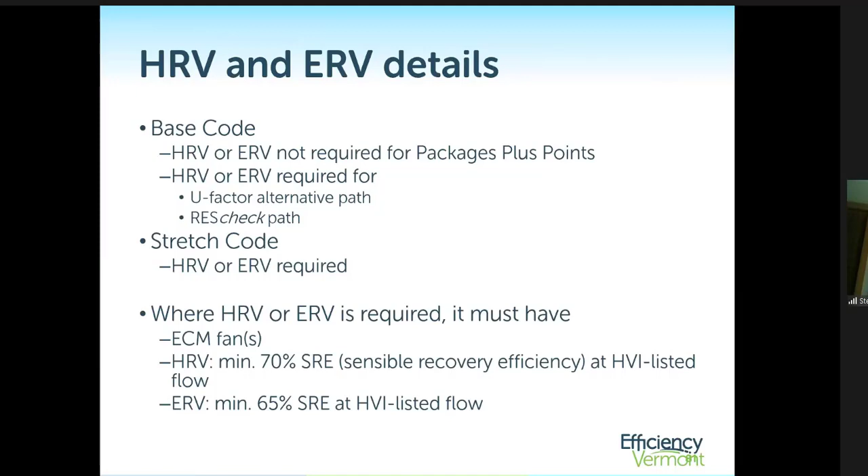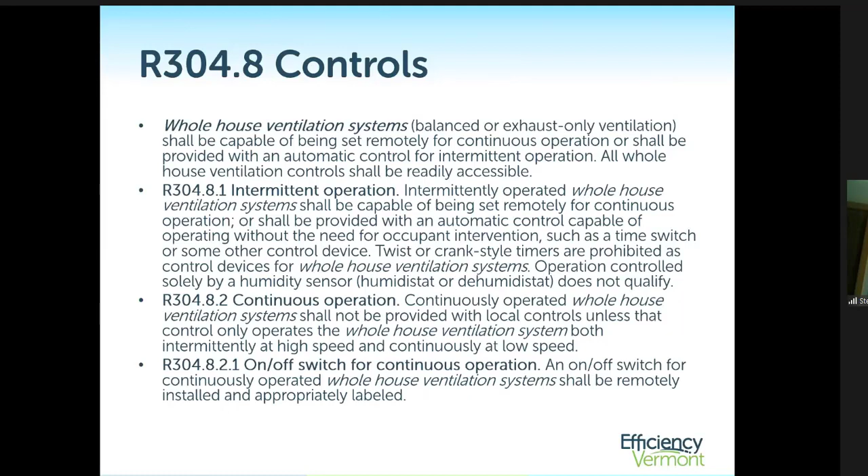Part of the mechanical requirements training I've put together goes into more detail about distribution design and best practice for both forced air systems and ventilation, because a big key for a lot of ventilation systems to do what they're designed to do, and to protect you as the builder so you're not getting callbacks due to moisture problems and other things, is making sure the homeowner is actually using the ventilation system.

And if you put in equipment that's noisy—either the HRV or ERV itself doesn't have a good noise rating, or you do a lousy job with the ductwork and it's noisy—the homeowner is probably going to turn that ventilation system off. And then whatever's been invested in it is lost. So it's important to understand the implications of equipment choice and distribution design.

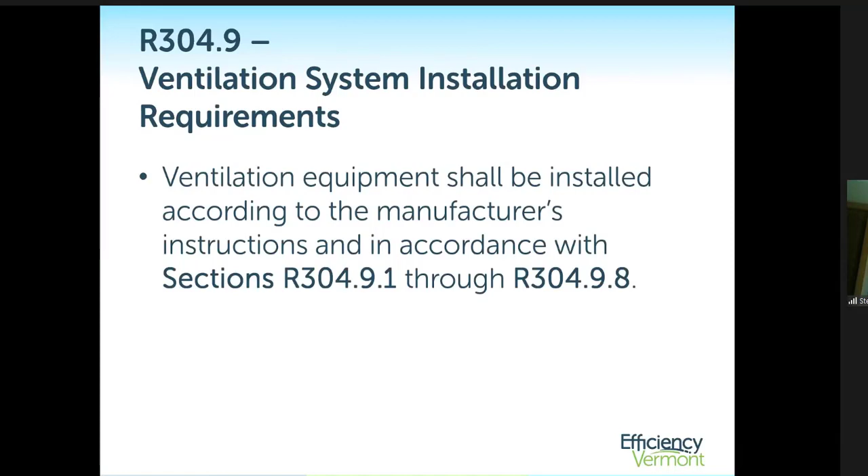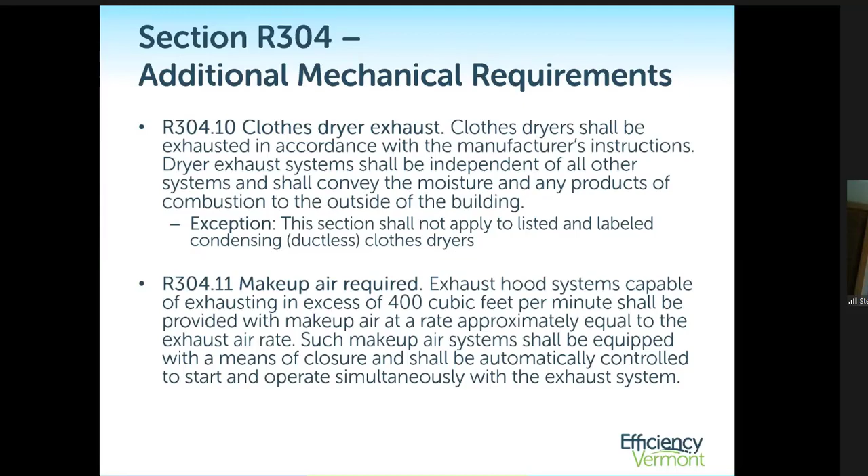So that was the shotgun fire hose approach to getting through the prescriptive compliance path for RBES for 2020. I'll share more content through Chris that'll be available for you for reference, and hopefully be able to do more of this type of content down the road with you.